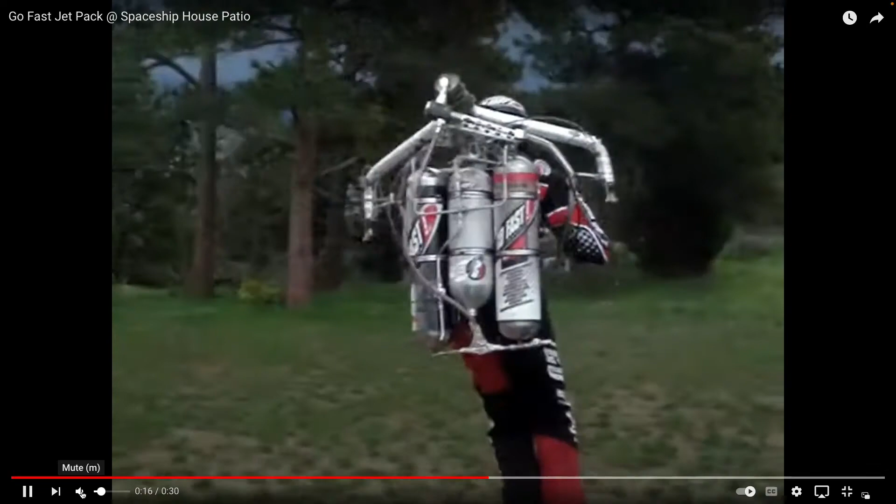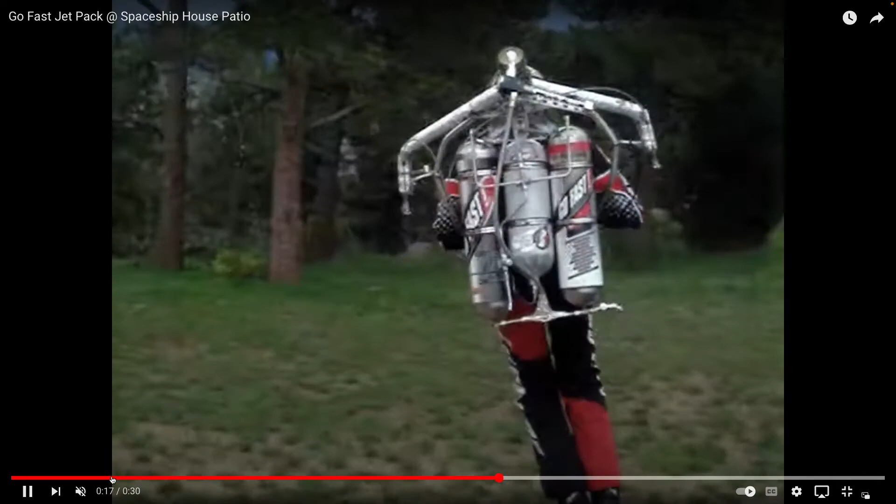So last time we looked at the hose pipe rodeo, right? The guy hanging on a fire hose with water coming out of it. So this is kind of an equivalent, a bit more practical in terms of moving around. A bit dated, I think. Tanks with that, I don't know, presume it combusts, and it's a little hot jet that comes out that gives

you enough lift. And it's really not that different from what we looked at San Francisco International, a jet airplane with a blast pushing a truck off. If you imagine that rotated upwards, so the blast is downwards and impinging on the ground, it's the same process. You're destroying the momentum of the jet that comes out when it hits the ground, and that's what allows you to be elevated. So anyway, we'll look at a few things that show us those effects.

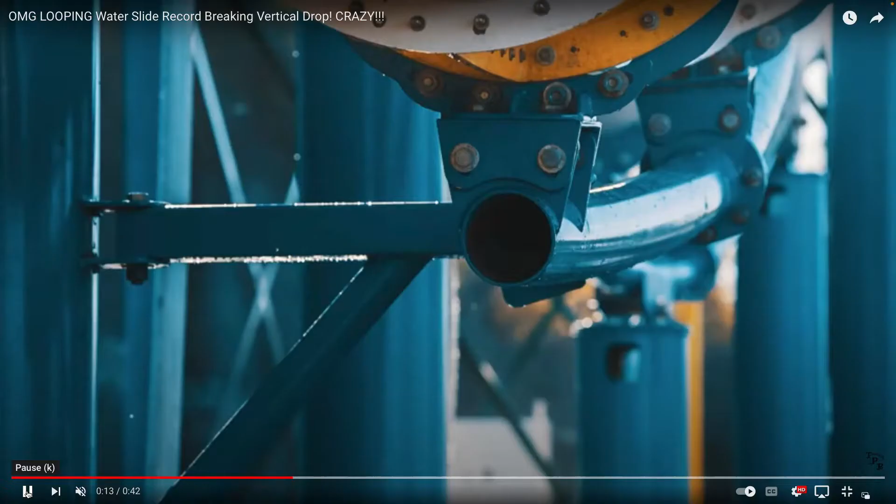I don't know what this is, but anyway, you could imagine the same thing with water in it. I don't know if this is a mock-up. It doesn't look like Six Flags to me, but it looks like a mock-up of something they're trying out, and you can see exactly what it is. They try something in it, but I'm not sure.

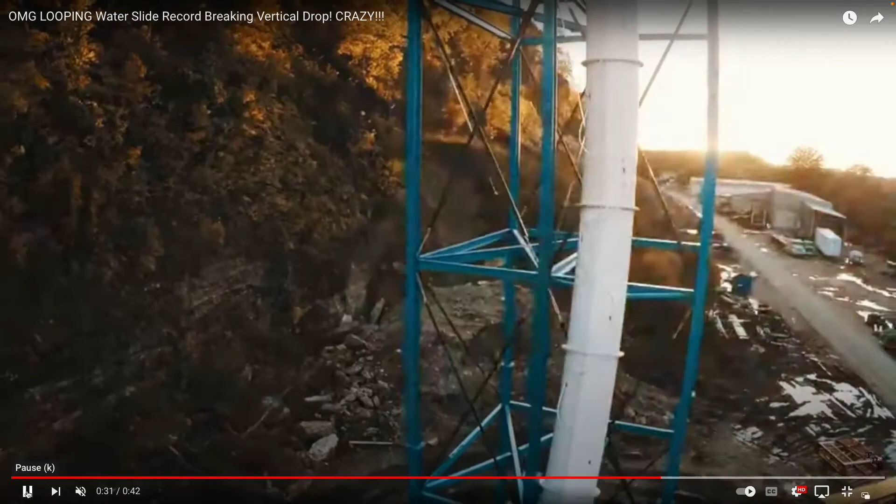Did they ever have the NASA thing take off yet? I don't think so, right? The first NASA one is with a bunch of mannequins in it, no people in it, and they still haven't done that. And I kind of guess that might be what they're doing here to test this out. Probably a good idea to put a sandbag or a mannequin in it first before you try it with people. But it's basically the same idea.

It doesn't look like they have a lot of water going down it, just enough to lubricate it. So perhaps it's not so much water flowing in it, but more just the person. So it's not so different from the car in that it's a solid object going around, and the water is just providing lubrication, so there's no friction, so you can get some speed up.

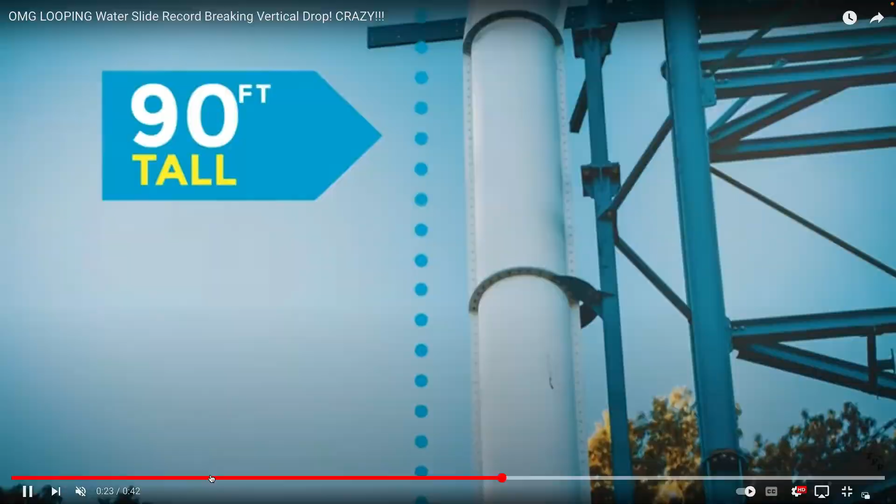And of course, in reality, I think we're probably, are we 90% water? We're a huge percent water. Bones would be separate from that, but blood certainly is mainly water and some other stuff in it. And our muscles and fat are essentially that as well. So anyway, that's what we'll talk about today. That kind of sets the scene for this.

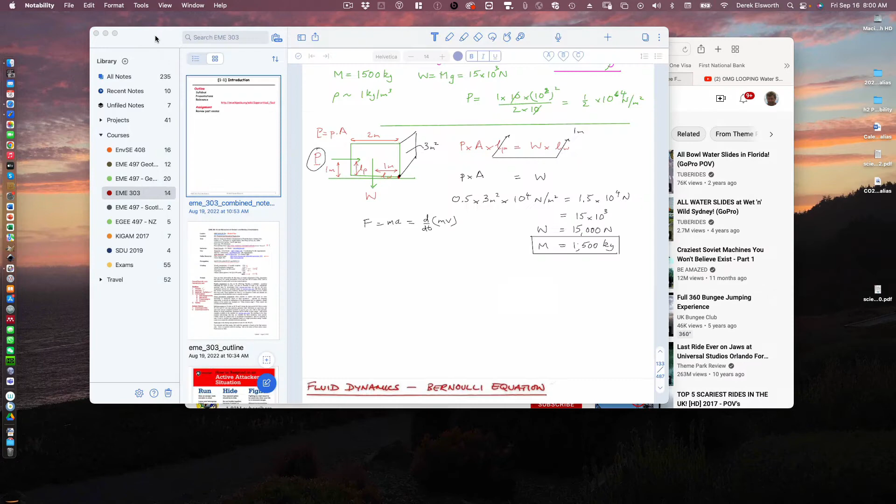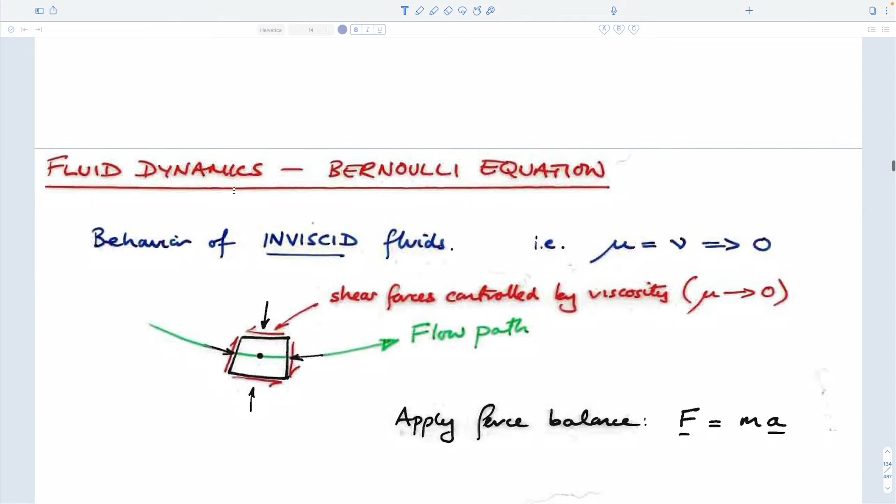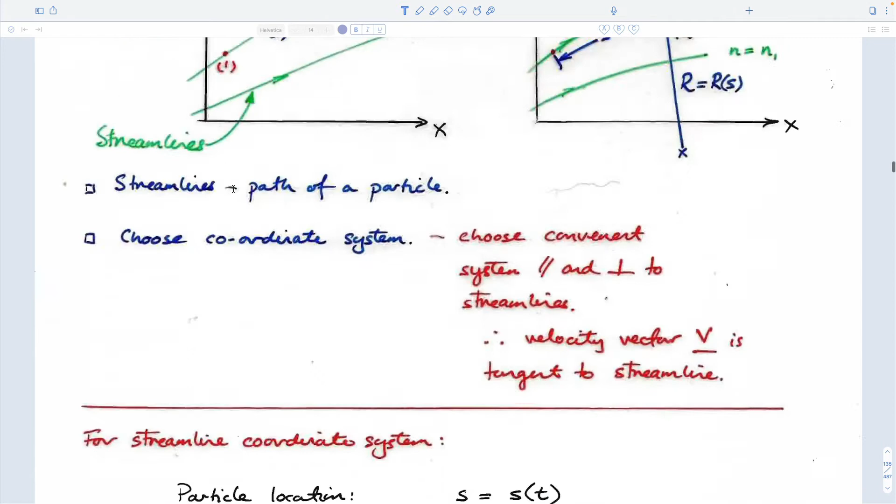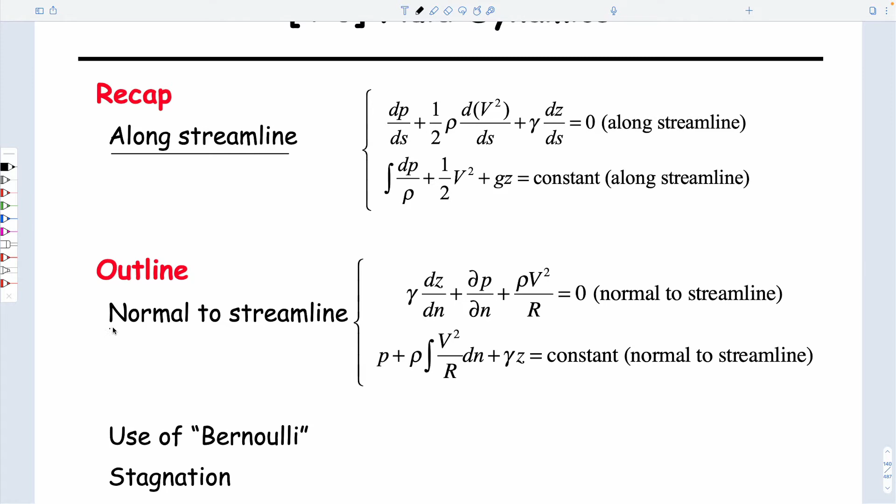Whoops, didn't want that. We'll talk about along a streamline, which we've already dealt with, and then we'll talk about flows normal to streamlines, which are rotational flows.

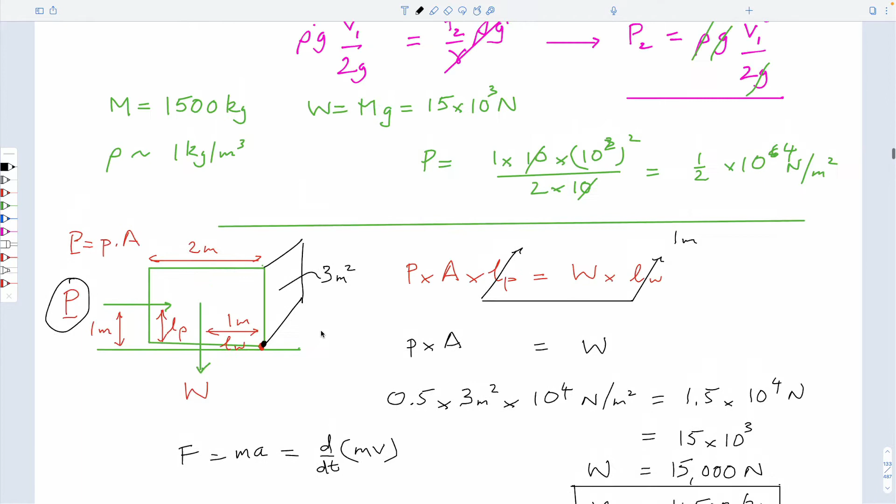But before I do that, I got some interesting questions at the end of class last time, and also by email, so I thought it might be useful to tie up this question we did related to forces acting on a truck, just to clear it up and make the points I wanted to make. We ran through it quickly, but the idea was that we could calculate the pressure at this point from stagnation.

And so I drew the pressure distribution as this, as you'd expect. The reason for that is it's a gas that's flowing. As you go down in the gas, the pressure really doesn't change very much, so it's uniform on the back. And so I calculated the force as the area of this times the magnitude of pressure.

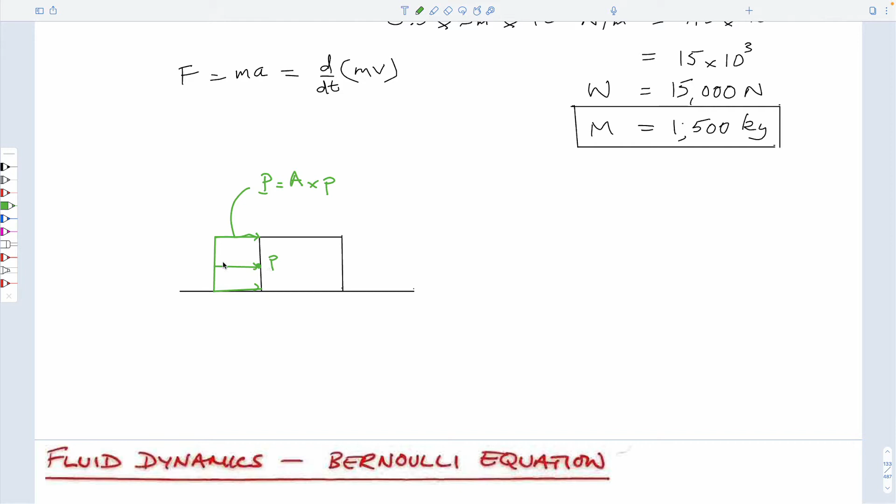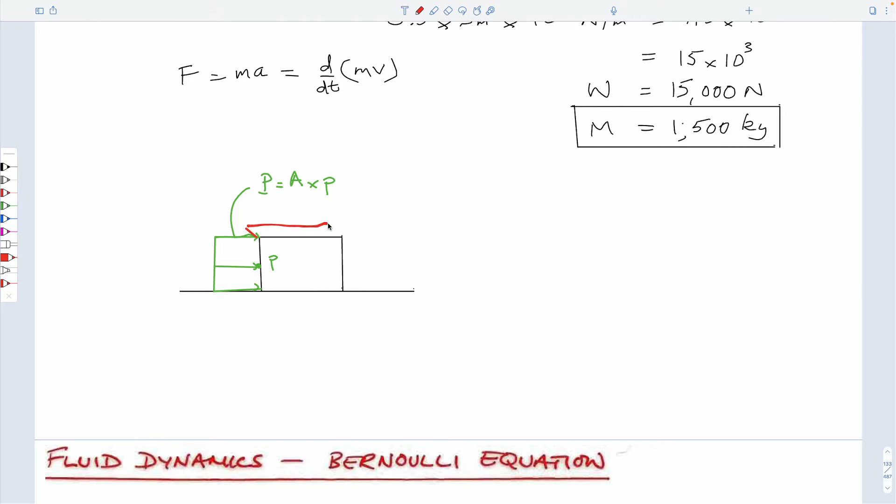You can imagine this as being the area. The area, of course, is the area of the truck, not the top area, but this back area, right? So this is the area A, and this is the pressure P, and this is from stagnation. It was traveling at a big velocity out here, and that velocity has gone to zero as it hits here. All the momentum is transferred into the pressure.

And as a result of that, we could use the three steps that we talked about in fluid statics. One, we calculate the resultant force, which is the unit weight of the fluid multiplied by the area times the depth of the centroid.

So these two terms here, let me write it out, unit weight times h sub c times area. This term here is basically equal to the pressure, right? We go down a certain depth in a fluid, at unit weight gamma w, and it equals this. Here we go down that magnitude, and there is no gradient because it's merely a uniform distribution. And so we know that for this case the centroid where it acts is at half height. This height is equal to this height.

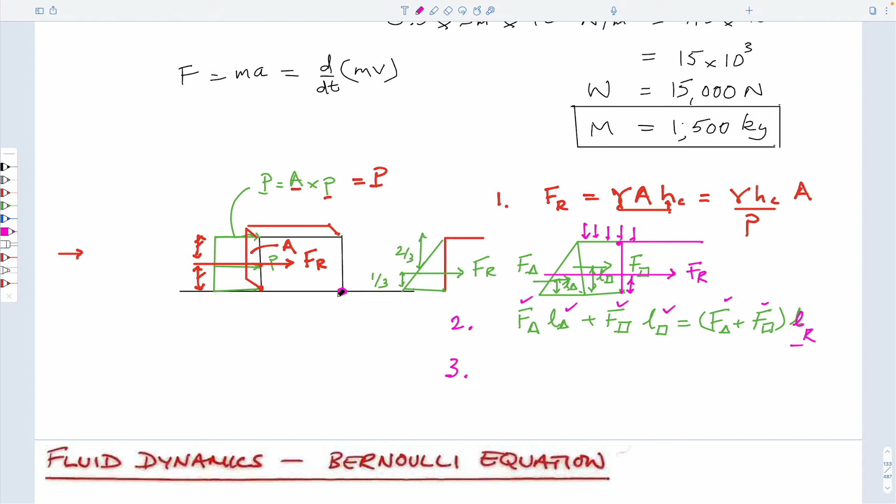The third part that we talked about in statics was that if we want this truck to roll over, we have to take moments around a specific point. It fails in a specific way. It gets blown over, it rotates around the wheel on the downwind side, away from the jet, so that's a reasonable failure mode. And so we took the weight, which acts through the centroid, the center of gravity, half the way along the truck, and we equated it: FR multiplied by LR equals W LW.

And again, we know this dimension, we know the height at which this acts. For a uniform distribution, it's half height. For a triangular distribution, it's a third height. For a combination of triangular and horizontal distributions, it's somewhere between those. And of course, we can get that from this other expression you'll remember, which I won't go into. Is it YC over, I can't remember, something here.

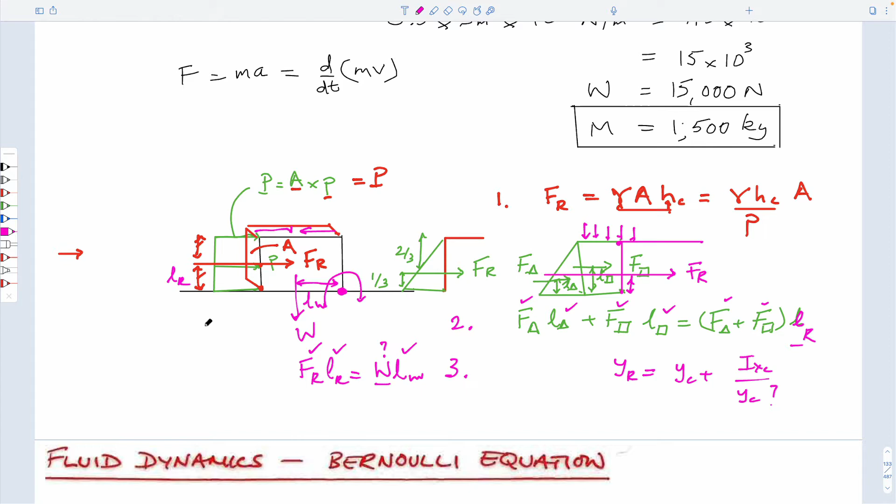And so in this particular case, we knew the force. We were calculating what weight of truck it takes so that it doesn't blow over. And it was 15,000 newtons, which is 1,500 kilograms. And that was our solution, our end game for dealing with that. So just to make the point that that's the case.

Another question that came in on email was, what happens if we do the calculation in absolute pressure or in gauge pressure? These are all in gauge pressures, right? We're taking atmospheric pressure as 0, and atmospheric pressure is acting on this side, so we don't have to have a force that's acting. If we were to do our calculation in absolute pressure instead of gauge pressure, we'd add 100 kPa onto this distribution here.

And we'd add 100 kPa onto this distribution here. And the answer would be exactly the same because they cancel out on both sides. And so there is no difference if we use absolute or gauge pressure. Typically, it's easier to use gauge pressure because the pressures acting on the outsides of structures are going to be 0. So atmospheric pressure as a gauge pressure is 0, but as an absolute pressure, it's equal to 101 kilopascals.

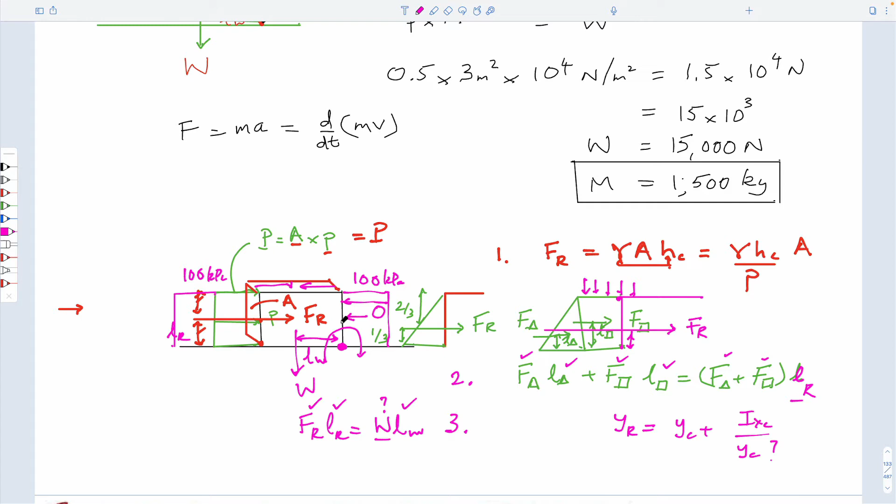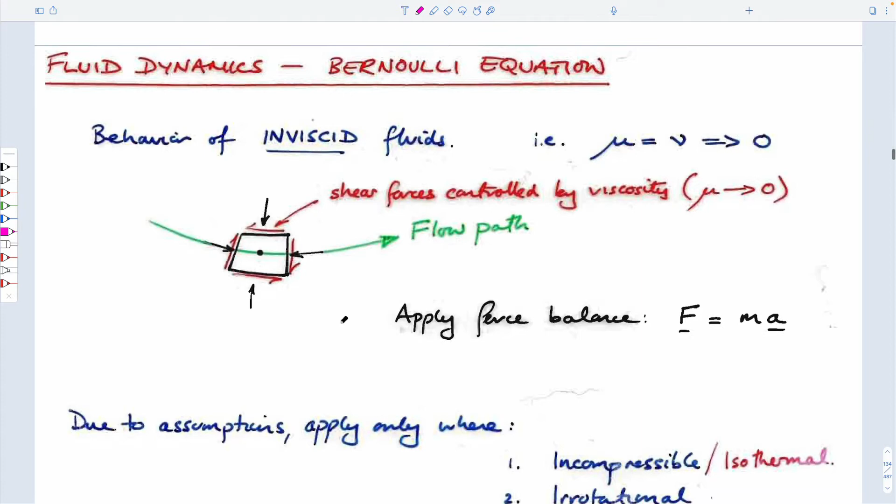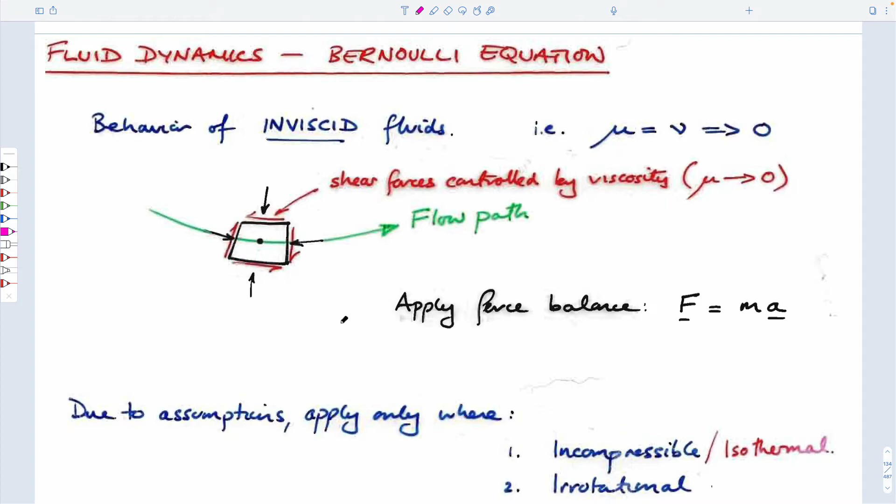Okay. So I mentioned that. So no mystery here. Question 2 on your test is a question that probably involves something like that. So 3 steps: magnitude of the resultant and how to calculate it, location of where that resultant acts and how to get it, and then what to do with it to see how something fails. It's no great secret in terms of what that might be. All right? And everyone gets to know this, even the people who look at the videos after the fact.

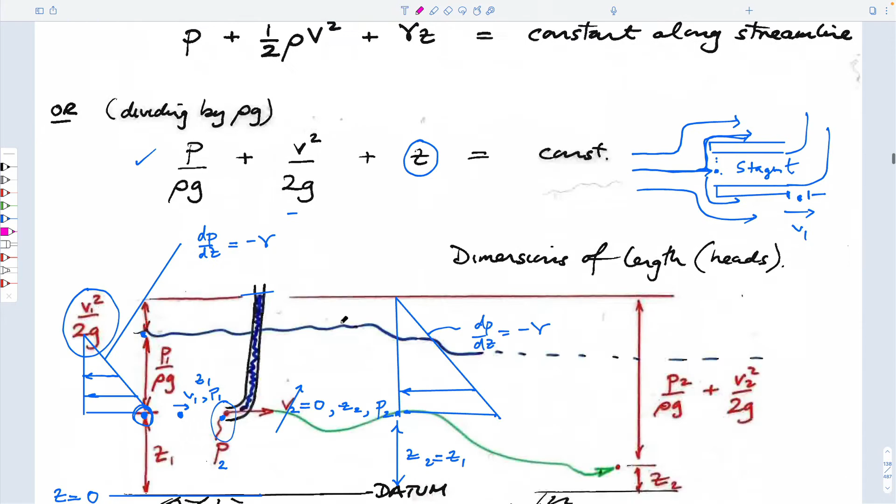All right, so back to what we'll talk about today. So to recap, we talked about Bernoulli in these 2 modes. They're exactly the same equation. They come from the same expression that I had as if I'm accelerating across the front of the room with fluid in a container. This is in its kind of raw form, if you like. This is if we integrate it. If we integrate an expression, instead of being 0, then we get a constant.

Physically, what it represents in terms of our geometry, looks kind of like a whale. I don't want it to be a whale. In terms of the geometry that we're working with, this was the idea that we had a normal and a streamline direction. We'd have multiple streamlines. We did this last time. I think we called this point number 1. Or perhaps we call this point number 2. And we're going to look at these points 3 and 4.

So last time we said that if this is constant, I tend to write it as pressure divided by unit weight plus elevation, I just switch these terms around, plus v squared over 2g equals constant. And you recall that we could write it upstream and then downstream. They have to equal each other. And so we're going to have 6 quantities. Hopefully we only have 1 that we want to determine, and therefore we know the other 5, and we solve for the other one. And that's exactly what we did with the examples we attempted to do. And so that was fine, and we'll do some examples as we go through this.

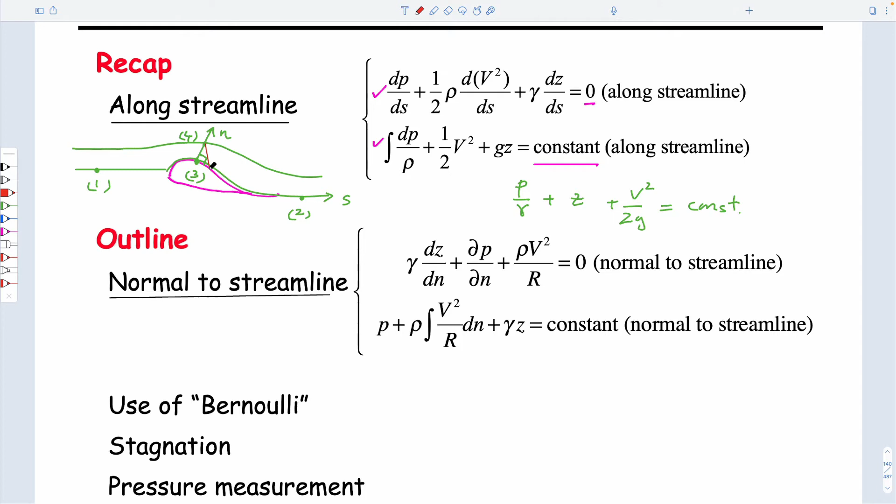We have another week of talking about Bernoulli, but we'll also introduce a second way of thinking about Bernoulli today, and that is the idea that we can look at behavior as we go across a streamline. So we can go from this point to this point. What will, for instance, the pressure distribution be like as we go across it? So if we're in a swimming pool, I guess we'd kind of expect that relative to the pressure at P4, the pressure as we go across it might be proportional to the unit weight of the fluid multiplied by the depth at which we go down, right?

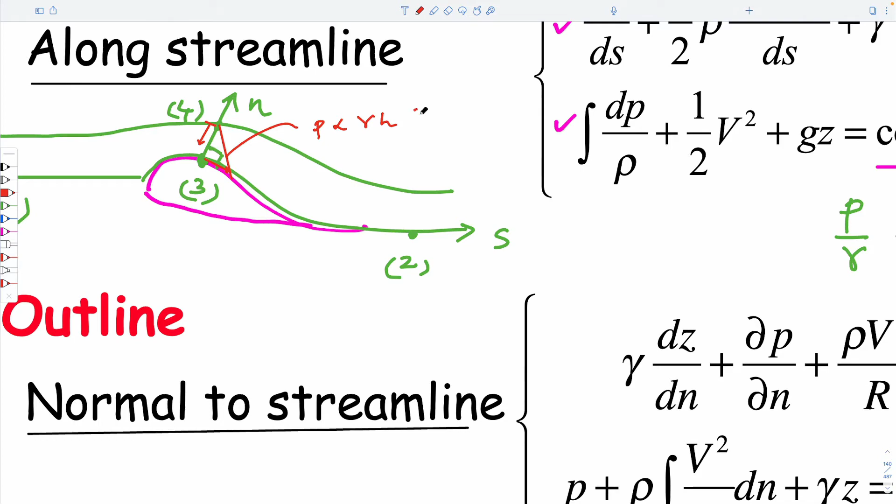But it's not a static fluid. It's doing something else. It's not even a horizontally translating fluid. And so the question is, what is this distribution as we go across here, if we want to be able to do that calculation? And so we can use Bernoulli to talk about that. And so one way to look at it is to go back to our expression for Bernoulli. I made the case before that this is just an exposition of Newton's second law. Forces in one direction, actually forces in three directions, right-hand law, is equal to mass times acceleration.

And when we talked about this, it won't come as a surprise that this expression is equal to, forces are equal to angular acceleration. And we talked a little bit about the idea that we could take a weight which has a mass attached to it.

Oh, so actually it'll be a weight which is equal to a mass times gravity. And we can look at the force that is attached to that as a result of swinging this at some kind of velocity v theta. And of course this velocity is in a curve, right? Because I'm swinging it around my head, or actually in this case I'm swinging it in a vertical plane.

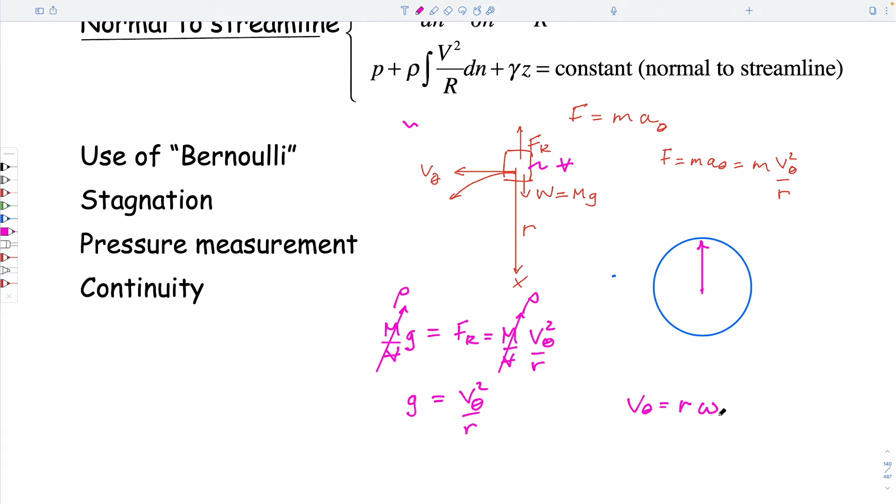And v theta, by the way, is equal to the radius times the angular velocity, number of revolutions. So we could convert this into revolutions per second if we wanted to. I've written it as an equality, but I suppose we could think of it that this has to be the case for it not to fall down, right?

So gravity, when I'm upside down in the car, is pulling down on me. For gravity not to be larger than the force that's acting up on me by my centripetal motion, this term has to be larger. So this equality can be thought of as a requirement for us to be able to determine exactly the velocity we need to go at.

So if we write it as an equality, why can't I do this? Okay. We have to be going at a velocity which is equal to the square root of gravity times r, right? Just by rearranging this.

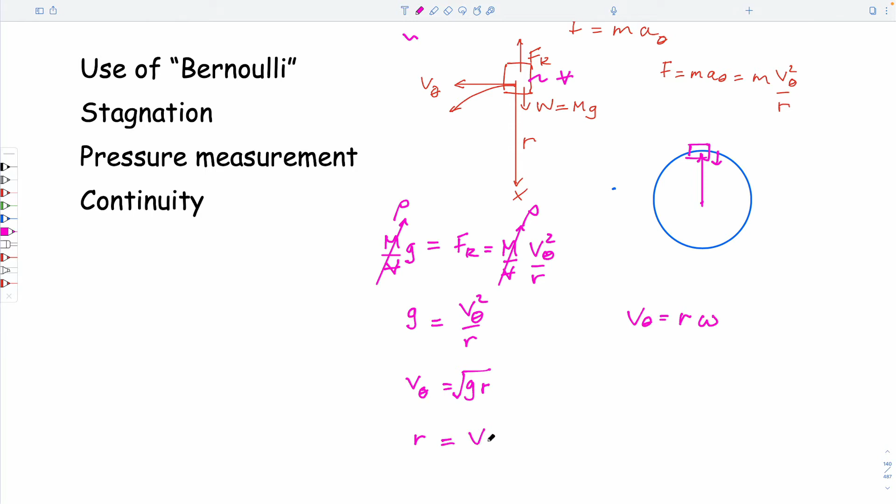Or the minimum radius for a given velocity has to be equal to v theta squared over g. We're always doing it on this planet, but if we're doing it on a different planet, if gravity was smaller, then the radius would have to be larger. Or if we were doing it on the moon, the velocity would have to be different. And so this is the minimum velocity we have to be going at, such that we don't end up on our roof on the floor here, basically.

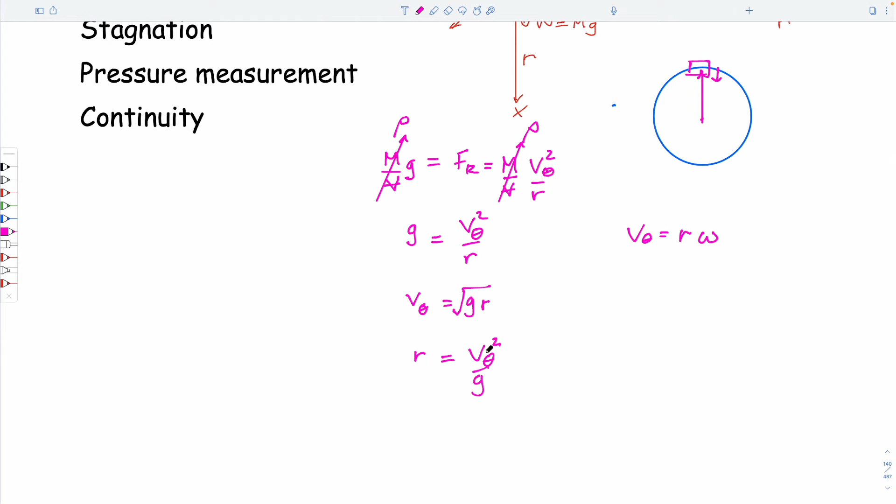And so that is exactly what we're talking about today. In previous years, I would derive this expression. I'm not sure that serves us much purpose. Let's just take it as a standard result. If you really want to look at the derivation, you can look at last year, and I derive it from the rotational equations that we used when we looked at a container that is twisted on its central axis at some velocity, and it gets this arcuate surface to it.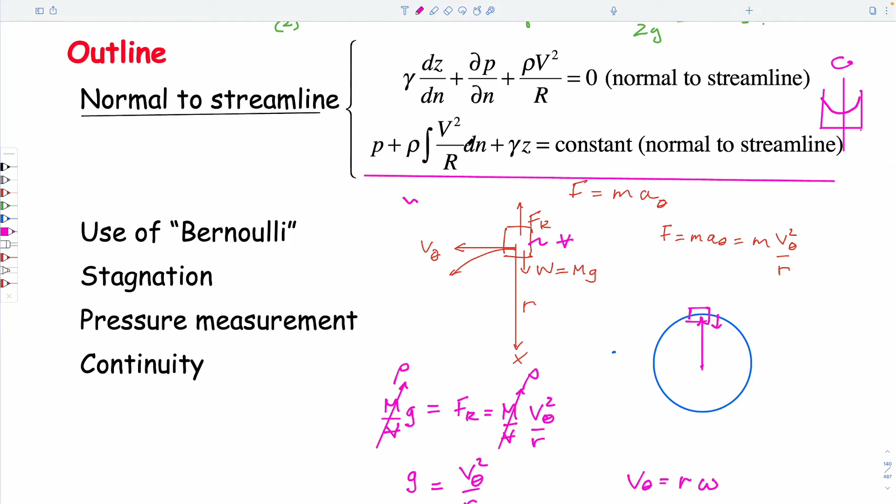We just use this expression. It's really just a reuse of f equals ma, and we come up with a standard result. But instead of that, let's use this expression. You can see what the individual components are: pressure head, elevation head, and velocity head, inertial term. This is the mass times acceleration term. And what we can do, just as we did with Bernoulli last time, is write it at two particular points, but those points will be points going across a streamline.

And we also just need to be able to remember that this is the streamline velocity, right? If you're looking at the velocity along a streamline, which is in this direction here, the definition of a streamline is that perpendicular to that streamline, the velocity is zero, right? If you align a coordinate system in the direction your car is going, that's the maximum velocity. The velocity of your car in the vertical direction is zero. And so that's the same here.

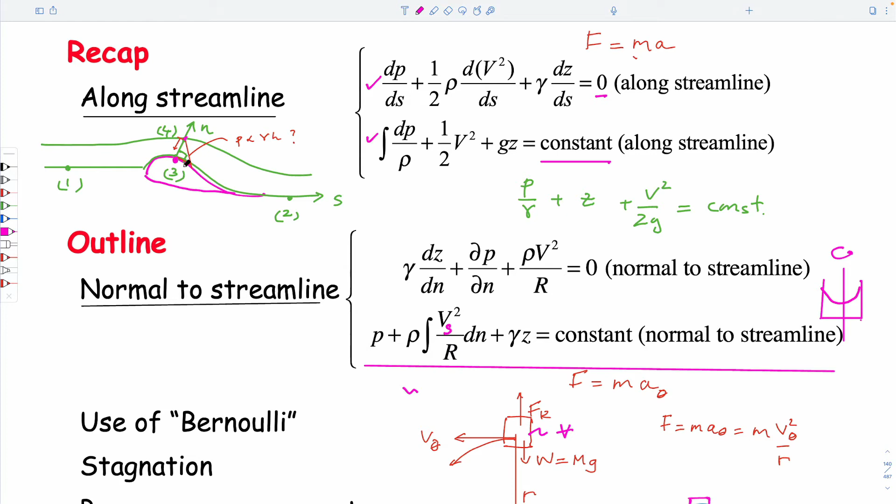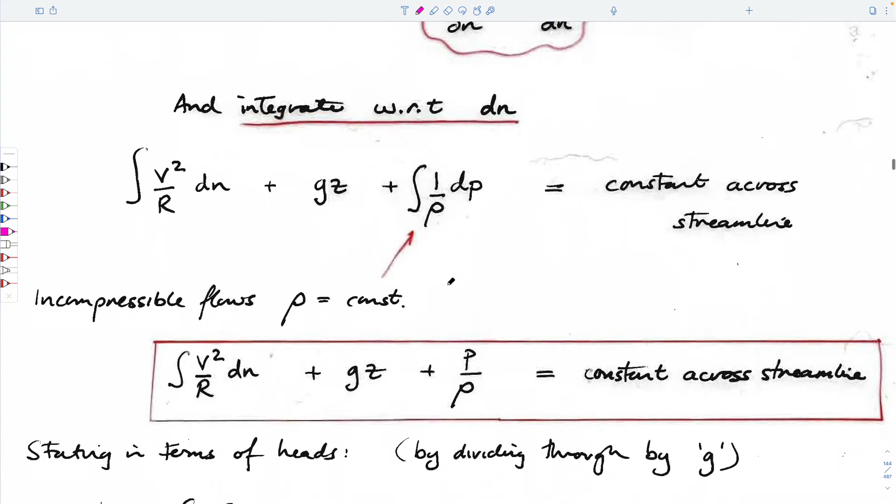So this velocity that we're using is the streamline velocity, not the normal to the streamline velocity, because the term would be zero. And so I'm going to go through an example that's in the book. We don't need to go through the derivation. It's a relatively straightforward situation. So we have water flowing over a bump. It's the same as a car going down a road.

As you drive your car, I'm just drawing a cartoon. I'm not going to use the cartoon. But if you're going down the road and you go down a bump and you go to the bottom of the bump and get pushed up, you feel that you're sitting more heavily in your seat. If you do the converse and you go across a bump which is elevated, then you are flying off the top, well, actually it's not a good analogy. Then you feel that you're weightless if the bump is high enough, right? You can get airborne as you come up across this.

And so those different weights that you feel of yourself should be some clue as to what the pressure distribution might be as you're going across a valley that you go into the bottom and you accelerate back up out of. You might think that the pressure distribution is larger than it would be at just gravity, and this might be less than just at gravity. And so those are the basic ideas of what we'll talk about, and we'll see if that's the case. So I'm going to use a more reasonable color. So let's look at this here.

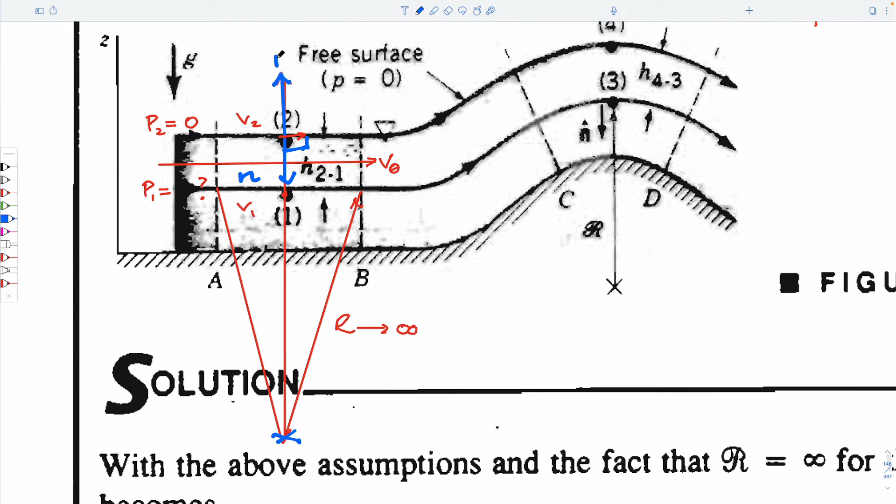And so a small distance in the r direction is equal to a minus distance in the n direction, just from the orientation of these. One is in this direction, one is in this direction. An increment in r has to be equal to a negative increment in the n direction. And so that's what we're going to use. We're going to write this in terms of our terms: P1, Z1, V1, P2, Z2, well, I say 2, but I write 1.

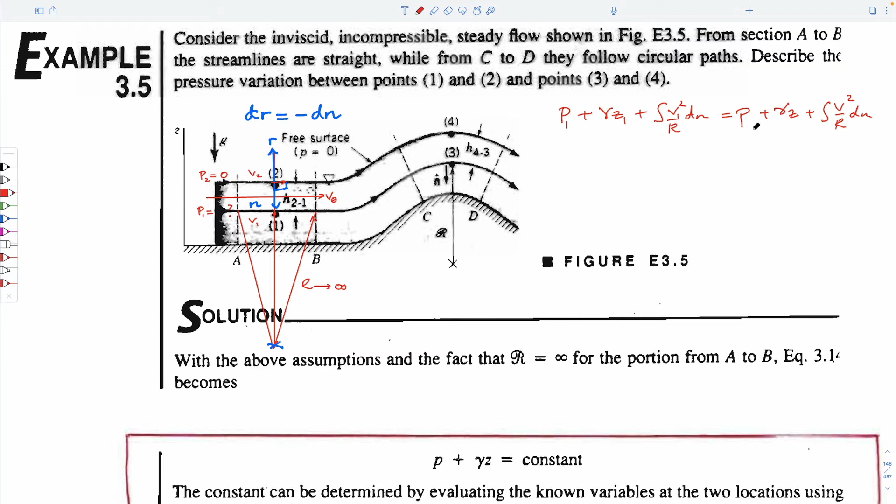We're going to take, just for convenience, V1 equals V2 equals V theta. Roughly correct. In this case, it's exactly correct, I think, just from the geometry. In this case, it'll be roughly correct. And then we're going to solve for what we don't know. So what we don't know, I suppose, is P1 is equal to P2 plus the unit weight of Z2, minus unit weight of Z1,

Z1, I can't speak this morning, and it's going to be equal to the integral, actually I'm going to write just as V, V squared over R dn minus the integral V squared over R dn. But these will have different limits. So this one is for the first one. It's going to be minus. This one here is this one. This one here is this one. And so these are going to be different limits.

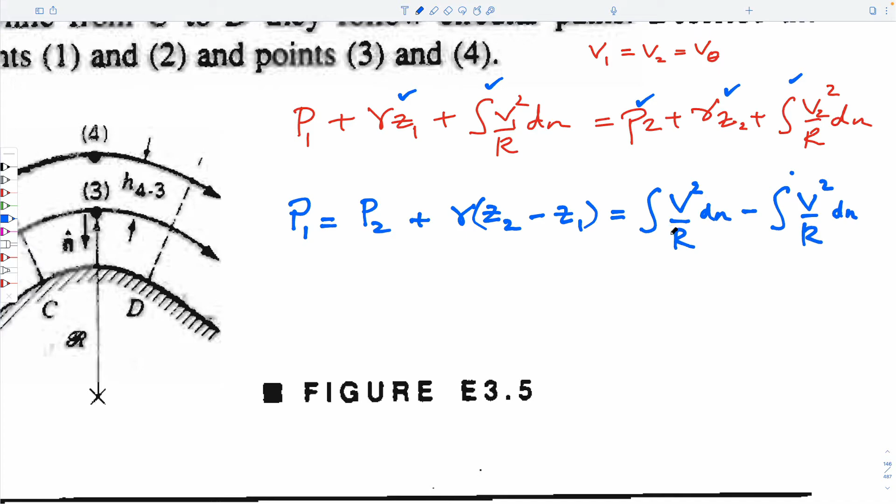So when you integrate something, we're going to integrate from the center of this point r equals 0 to r1. And of course this one here will be r2. And so these integrals will be what? We took it from here, so this is the second one. Second one is between r equals 0 and r2. The first one is between r equals 0 and r1. And you know, I'll draw it somewhere else. I know you're copying this down.

This looks like kind of a blunt implement, right? If we integrate a function f of r, whatever that looks like, then if we integrate it between r equals 0 to r equals 1 to r equals 2, then this term here is going to be equal to, if I change my color, so this integral here is basically the area under there. This integral here is basically the area here.

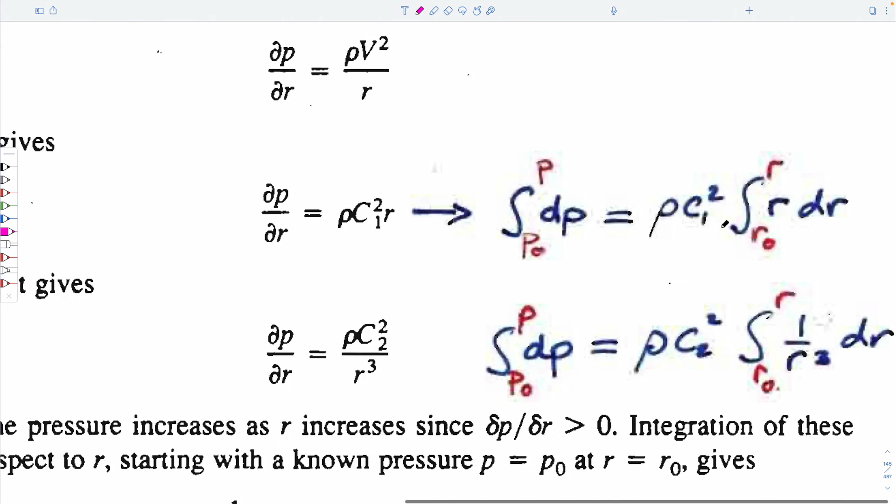And you're too compliant. You're not stopping me, right? Another question. In the original equation that we had used density. There's like density times the integration of v squared over r dn. Density was ahead of it. Yeah, okay, so that has to go then. Yeah. I have it written here. You're right. You're exactly right. Density is ahead of it. Right. Gotcha. Thank you. So density can be in or out. Thank you.

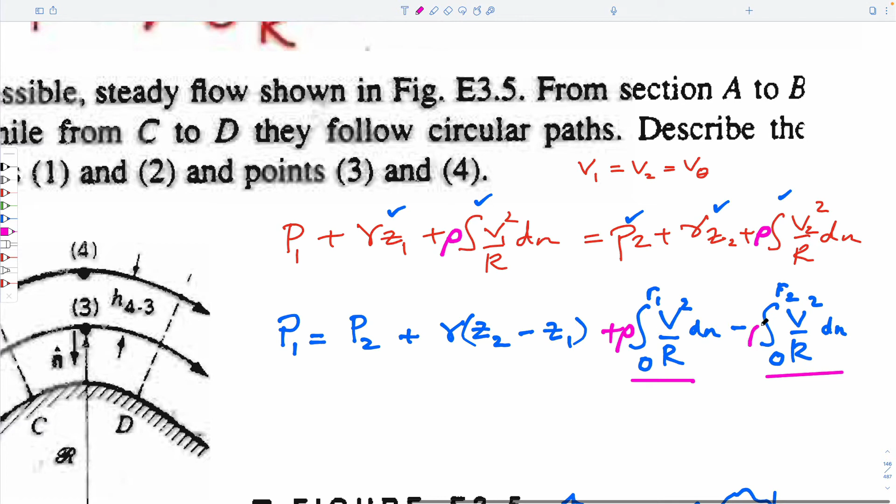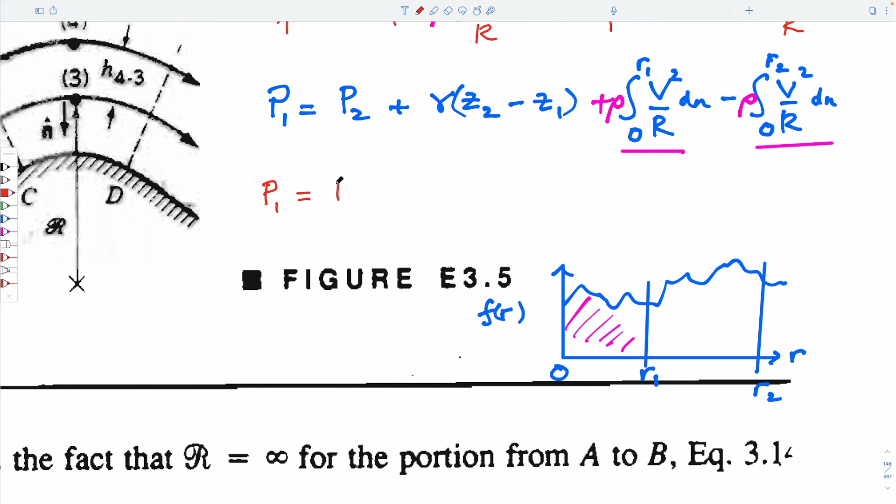And so if we subtract these integrals from each other, all I'm trying to do is get to a place where I can write this expression as P1, I'm not doing a very good job, is equal to P2 plus unit weight Z2 minus Z1 plus density, and I could write those two integrals as the integral R2 R1 minus, because of the way these are, and it's V squared over R dn.

So in this particular case, we want to take this term here, and we know that dr is equal to minus dn. So we could just replace this with minus dr. So this will go back to being positive. And the other final deflating thing that we realize is that r is infinity. So anything divided by infinity is going to be equal to 0. And so this whole term disappears and is equal to 0, irrespective of whether you have density or not. So this term equals 0. And so the bottom line is that our expression that we want is exactly this.

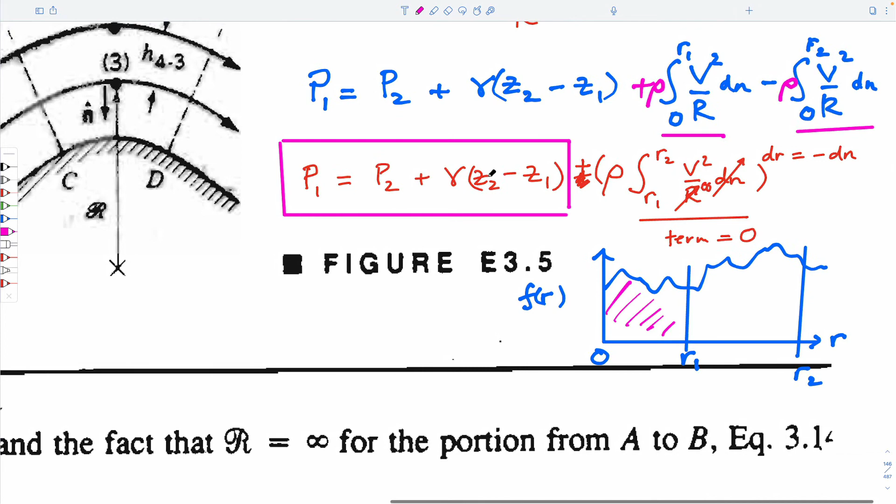And this is exactly our swimming pool equation. And so this says that Z2 is larger than Z1 because our positive z direction has to be upwards. Right? This direction has to be upwards in our system. And so all this is saying is that the distribution of pressures that we have conform to dp/dz equals minus gamma, our static expression.

So it's saying that the pressure at point 1, which we're calculating here, is just as if we were in a swimming pool. All the fluid is moving along at whatever speed we want, 0 or 100 meters a second. But regardless, the pressure at this point varies just as if it was a static fluid. So that's the easier one of our systems. Okay? So now we'll do it for this one. I'm going to clean off the stuff I have on the right-hand side.

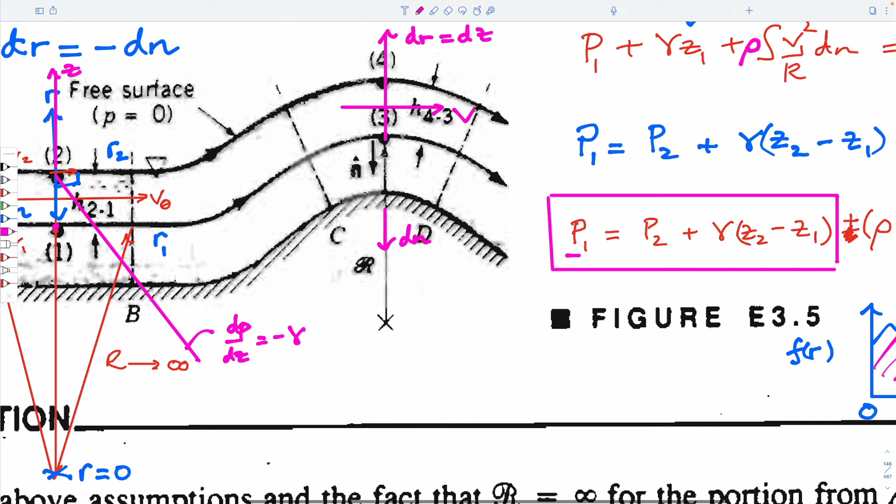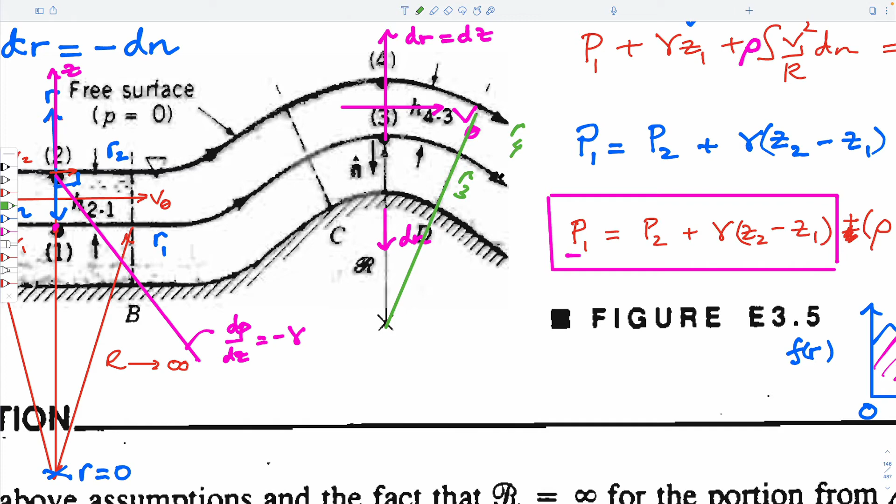We'll have the same things defined here. This is going to be dr equals dz. This is going to be the direction dn. This is going to be our streamline velocity, which we'll take as v theta, which is the same at 4 and 3. And the only other thing that we need, I realize this is getting to be a crowded diagram, is to look at these two radii. So this is radius 3, and this is radius 4. And I'm going to cut my losses and get rid of this.

And attempt it again. So I'll try and write the equation out correctly this time. So we are interested in finding out the pressure at point 3. So the pressure at 3 plus the unit weight times the elevation of 3 plus the integral density v squared over uppercase R dn is equal to the pressure at 4, which is 0 pressure, atmospheric, plus unit weight elevation of 4 plus the integral v squared over R with the density in there dn.

We want to determine behavior in terms of P3, so let's separate everything to the right side of that. So the other terms will be the same as before. It will be P4, which we know, which is going to be equal to 0. Atmospheric, it's on the surface. The elevations are going to be equal to the unit weight times Z4, this term here, minus this one here, and it's going to be plus the integral density v squared over R dn.

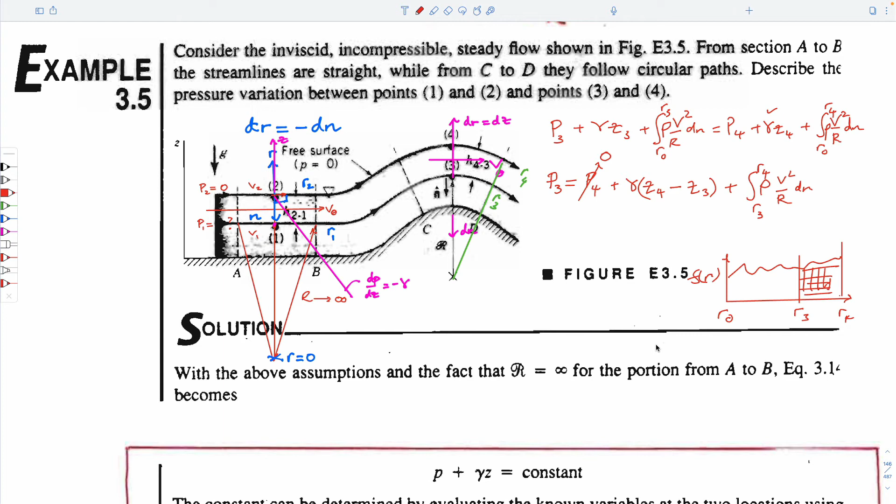If this is this, then the upper limit integral is this amount here, right? The integral below this term here and this term is all of this shaded area. The integral up to R3 is this shaded area, this term here. And so subtracting this whole area from this area actually gives us this area here, right? This is what this represents. And all we need to do is be able to figure out exactly our final manipulation.

So the pressure at point 3 is equal to 0 plus the unit weight of the fluid Z4 minus Z3. So this is what we would call our swimming pool distribution as we go from one point to another, plus a term which is equal to density. I'm getting crowded. I'm going to move down a bit, which is equal to density V squared over R dN integral between these 2 points.

And I suppose we could write this, if we wanted to, the integral density velocity squared over R dN. If velocity is a constant, radius is roughly a constant. If we just take the radius as equal to R and use the same one for both of these, then we can take this to being density V squared over R integral dN between R3 and R4. What is this integral? It's just the distance between these points, it's just this length. So it's just equal to R4 minus R3. In other words, it's the difference in the z's that we have here.

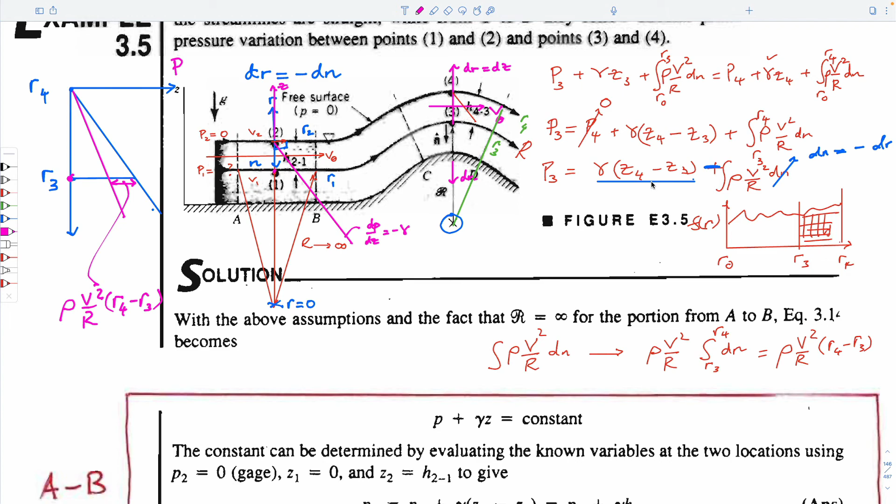All we'd have to worry about now is that these would be different from each other, and the direction of z would be different. So that's it. So I know perhaps the first pass through this wasn't so obvious, but it's worked out here in exactly the same form, and perhaps is quite apparent. It's Bernoulli, pressure heads, elevation heads, velocity heads for this.

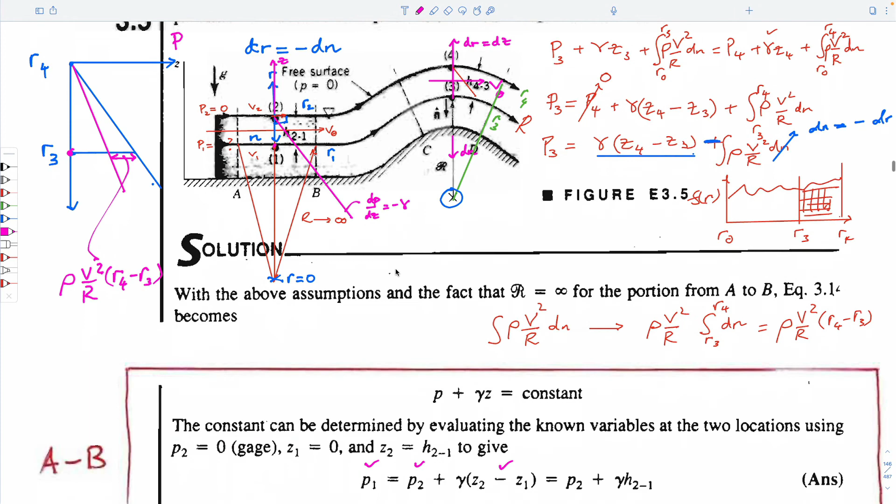I guess this, no, this is the one where they're parallel to each other, so we've already thrown away the velocity head term. We throw it away because we're going at the same velocity at each of these points, so it cancels out. And the one that's interesting is the one where we go over the hump. So again, this is Bernoulli.

So the pressure at point 4 plus elevation at point 4 plus the velocity head at point 4, which is this term here, and the pressure at point 3, the elevation at point 3, and the velocity term, which is this part here of this integral. And if you go through each of these, the pressure at point 4 is equal to 0, so it drops out. And so we're just left with this term here.

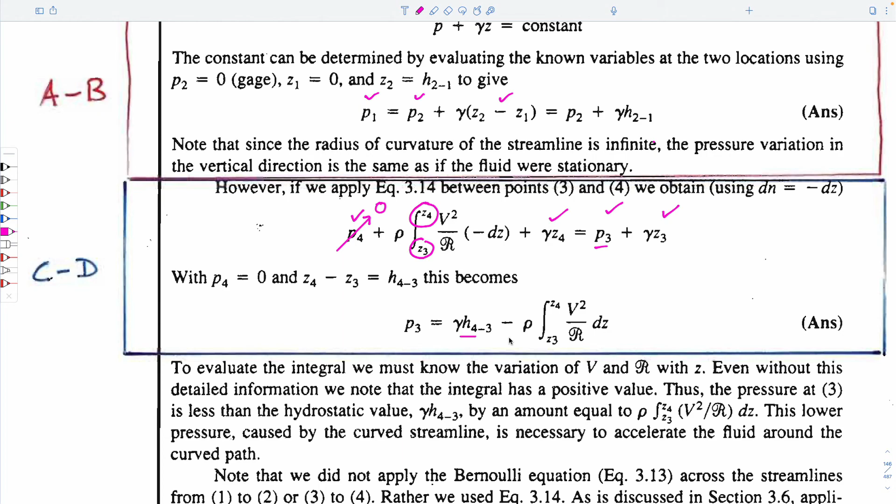The unit weight term is the difference in elevations between these 2 points, which is just taken as the height here. And we have this extra term where density is positive, velocity is a speed, which is always positive, and rotational radius is always positive. And so this term has to be positive, and it's subtracted from this distribution, and therefore the pressure at this depth must be less than if it was just this term alone, right?

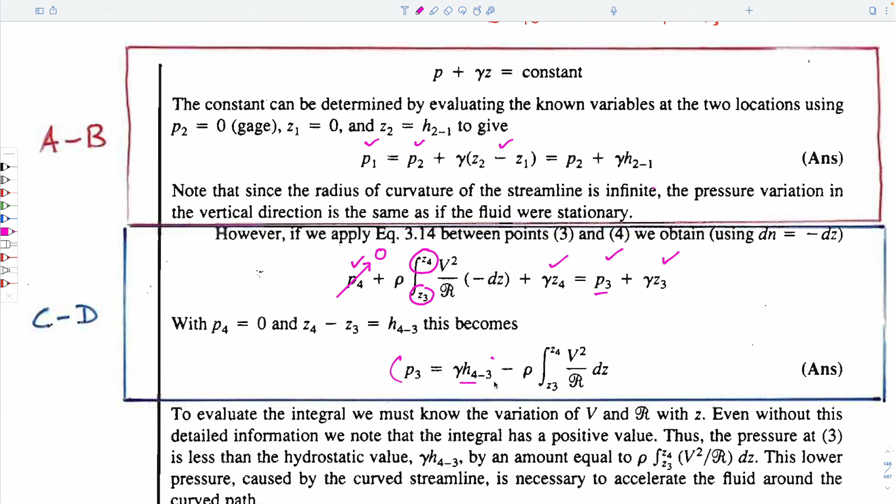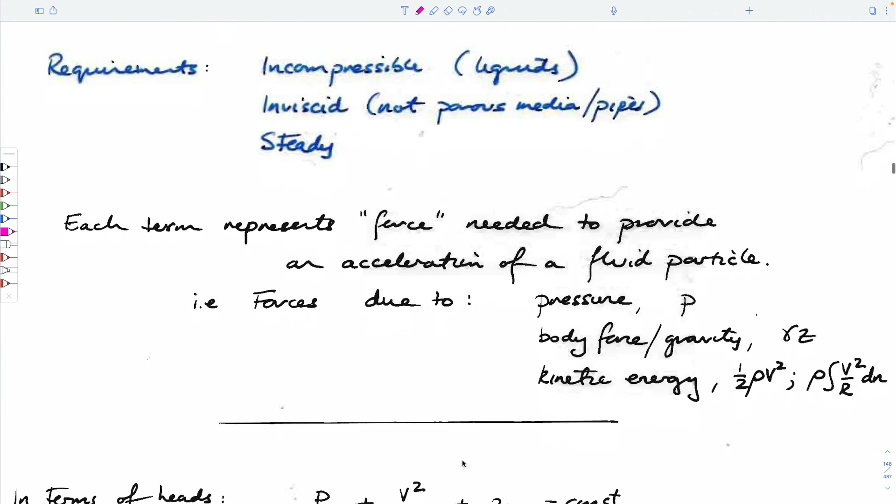That's it. And so hopefully that makes sense in terms of what we're doing. And it's explained, so if you want to go through it and torture yourself some more, then you can look through the rest of this material. Questions? Not straightforward, but manageable, yeah.

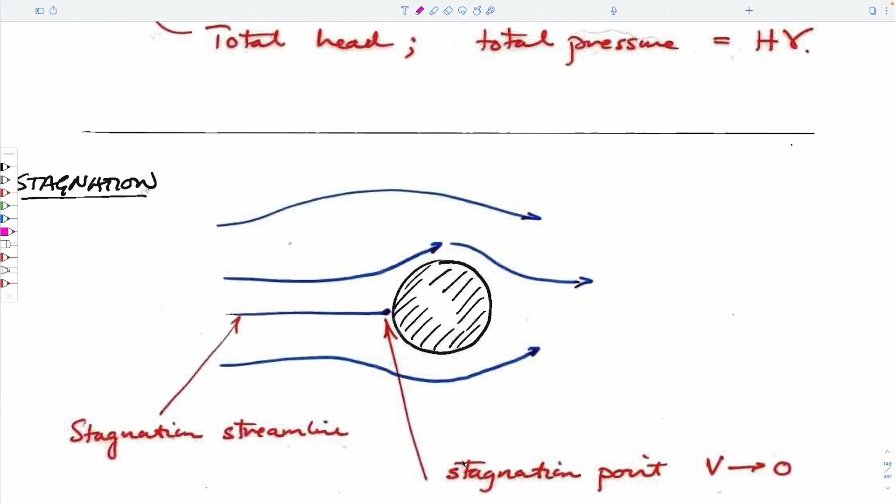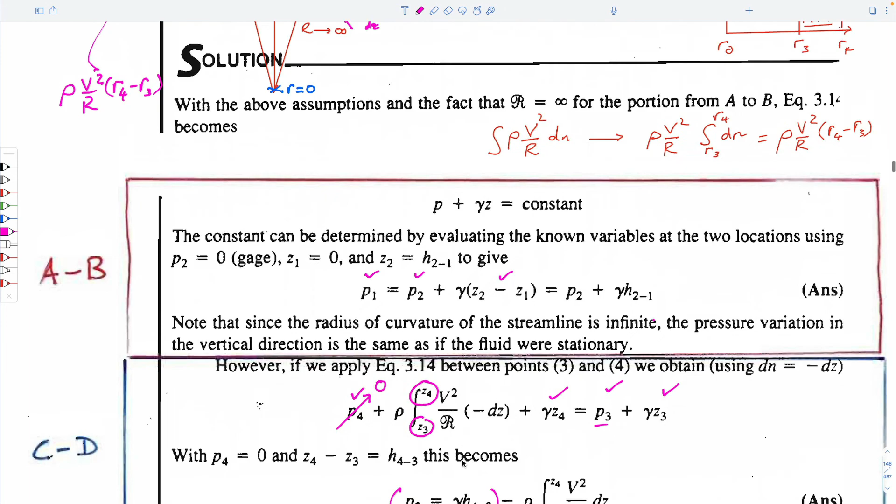For the graph you drew for R4 and R3. Say it again, for the what about R3 and R4? Keep going up a little bit. That one, the blue one to the left, is the x-axis pressure? Yes, sorry, yeah. P for pressure.

When we go over the hump there, for points 4 and 3, we just assume that it's a singular velocity moving through there, even though it would be faster at the top and slower at the bottom? Yeah. You could have them as different velocities. It gets very complicated because this term on the integrals becomes 2 separate velocities, 2 separate radii. And so the concept is, the effect is what you'd expect.

And of course, to go up on this, there's also a radius of curvature here, right? So there's a portion of this is this part. And so as you go up into this, you'd be pushed back into your seat. If you imagine yourself driving on a road, then you're going on a different radius of curvature. You know what you'd feel. You'd be pushed into your seat before you go airborne, and then I guess you get pushed into your seat again when you crash on the ground, and keep on going.

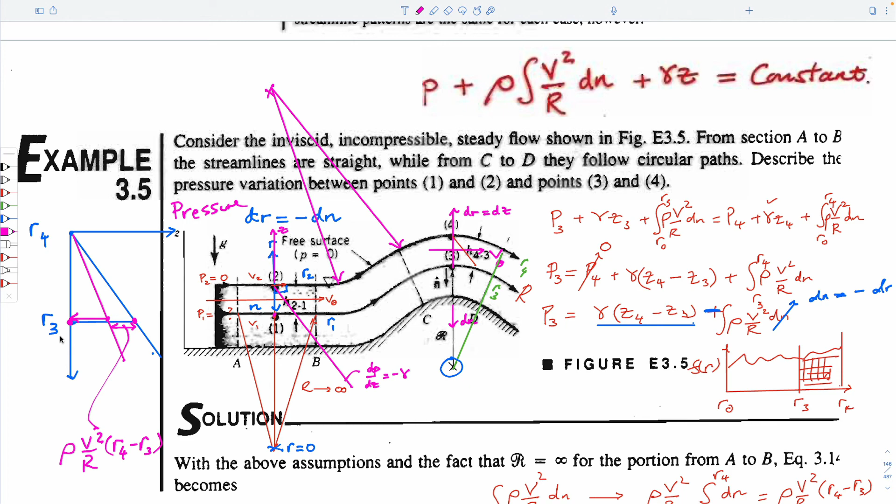But it should all make sense. And so if you're going fast enough, or the curvature is right, you can potentially get this distribution to move all the way here. And airborne means that the restraining force that you need to pull you down is exactly the same as mass times gravity that's resisting you going up.

So that's it. Usually in this class, I go through a couple of examples. We looked in the videos early on at an example of a loon flying into water and air and going between the two. This is air, this is water, and it asks you what velocity in water do you have to be going at for the pressure on the beak of the loon to be the same.

And so that's taking account of the fact that as it goes across the water from point A to point W, you can write Bernoulli's expression as pressure W plus VW squared over 2g. Elevations are the same, so let's not worry about that. That is equal to the pressure in air plus velocity in air squared over 2g. Point A and point W is where the loon's beak is as it goes from one to the other. They're essentially at the same elevation.

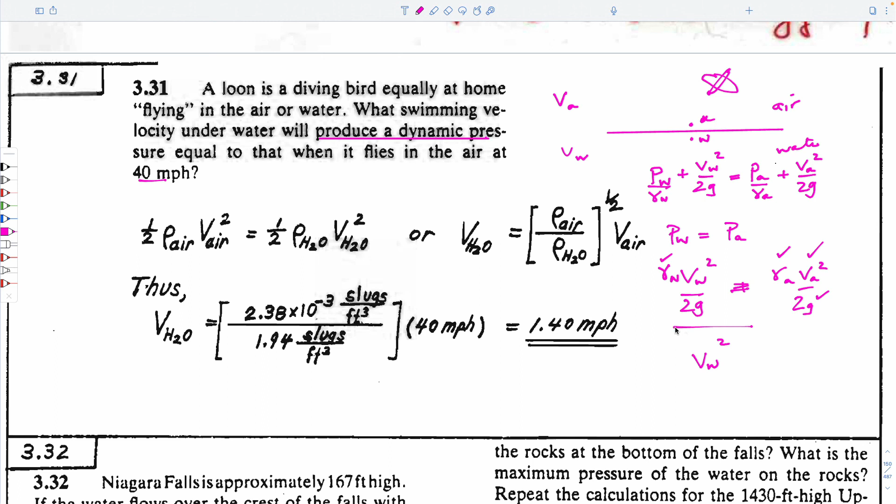So this is equals. And then if you know the air speed is 40 miles an hour, you know what gravity is, you know what rho g air is, you know what rho g water is, and so the only term is to solve for VW squared. And I only mention that now at the end because I noted last night that my solution was wrong last year. So don't get your solution from last year's video.

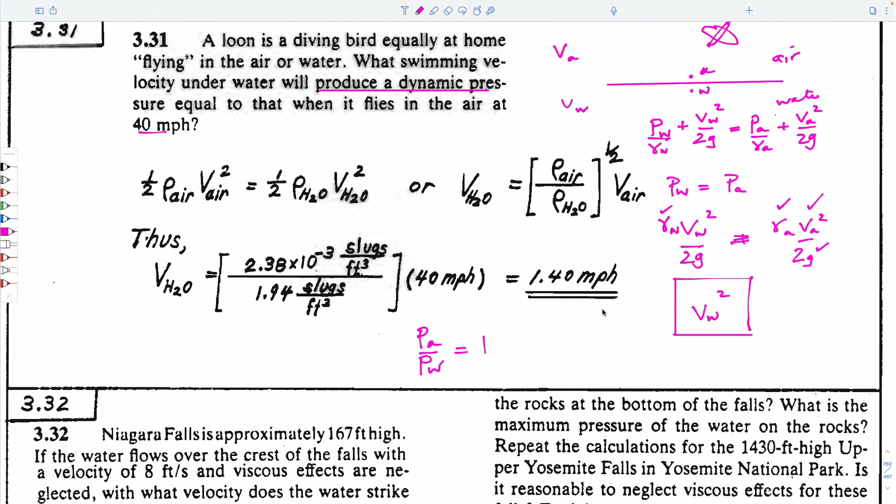So you can write Bernoulli at each point. The bottom line is that you can solve in terms of P air over P water has to equal 1. And so you can just look at the ratio of each of these. So that's exactly what this expression is here. And we didn't get to it, but I think the solution from last year for this is right.

This is Jesse Sharp going across the top of the falls. How do you solve this? If you know that you're going at the speed of the Niagara River, you know that point 1 is V1, the atmospheric pressure is defined, and the elevation is equal to h. You know everything about Bernoulli at this point. You can do two things. You can calculate the velocity just before impact at point 2, or you can calculate the pressure you develop as Jesse Sharp hits the water at 0 velocity at point 3.

And so for each of these points we realize that at point 2 we don't know the pressure, oh sorry, we do. Pressure is still atmospheric because we're in the air. The velocity V2 we don't know, but we do know that Z2 is equal to 0. This is just the datum that we've taken, just above 0. So if you write Bernoulli for point 1 and point 2, there's only one thing you don't know. You don't know what V2 is. And you can solve for his pre-impact velocity, just as he's about to hit the water.

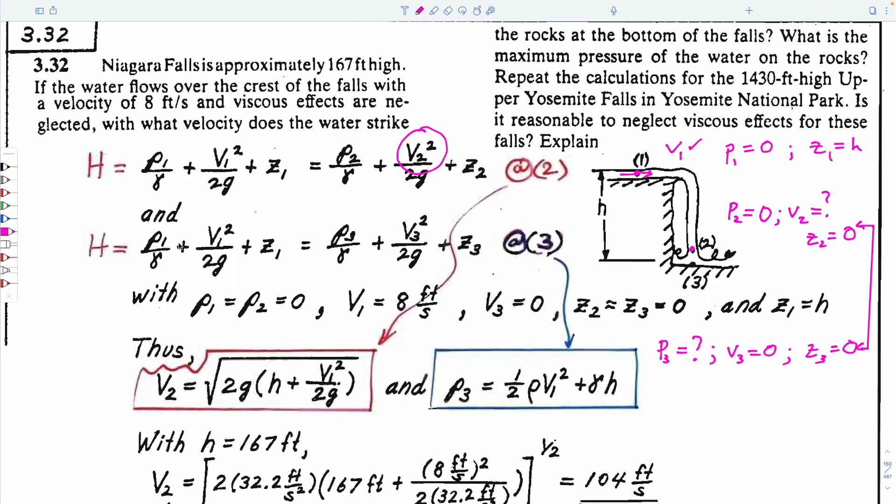And at point 3, we don't know the pressure because it's like the air hitting the side of the truck. We know it's stagnated as it hits the truck. It's going at 0 velocity. We do know that V3 is equal to 0. We do know that the elevation Z3, which is essentially equal to this, is equal to 0. And so when we write Bernoulli between point 1, which is here, and point 3, which is here, the only term we don't know is P3. And it solves for each of these, straightforward.

So that's Bernoulli in a nutshell. So we covered both of the things we need to now. I guess next time we do some examples. We've got another week messing around with Bernoulli, but those are the basic principles for linear acceleration and also for rotation. Great.